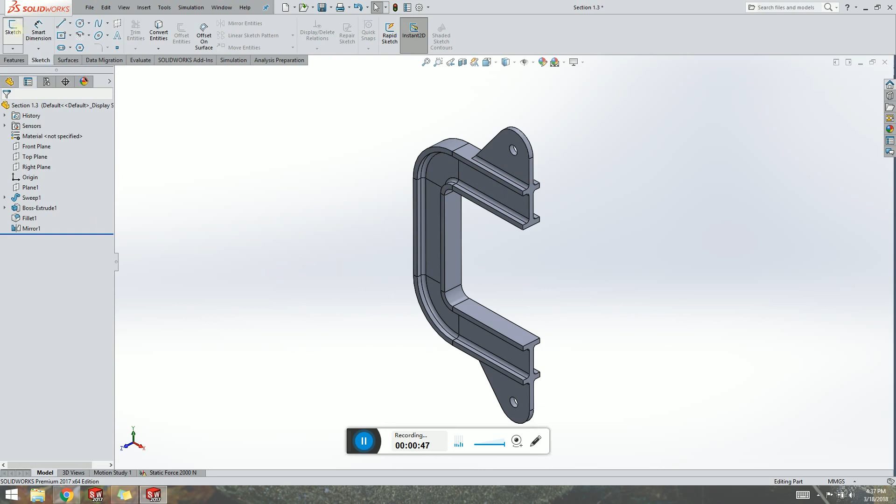So what they do here is they make a sketch, and we're going to do this on the front plane. And then we're just going to sketch points. One's going to be up in here somewhere, and the other is on this face. So we're just going to select that point there, which is then coincident at that midpoint. So for this one up here, we just want to dimension.

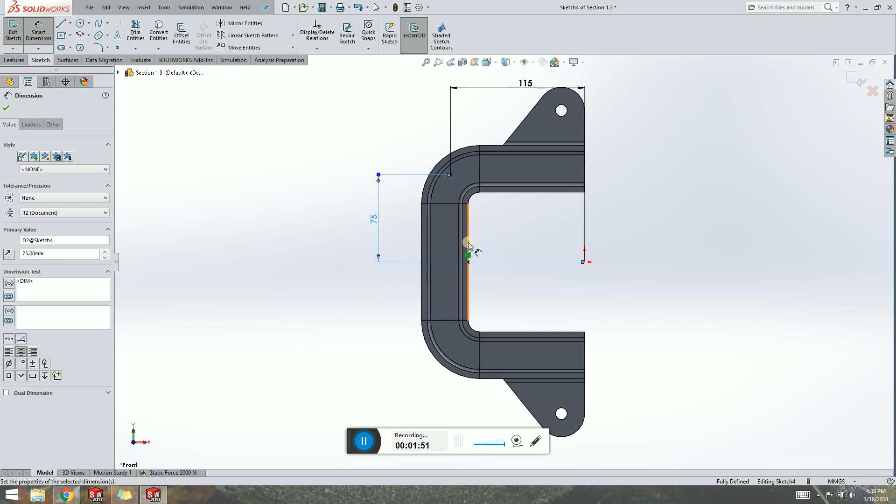I'm going to go, I think it's 100. No, it's got to be 110. Maybe 115. Regardless, I guess it's not that important as to specifically where this goes, but my tool is not selecting as I want it to. This one's going to be 75. Alright, so we have our point in there somewhere. Select that. So now we have these 2 points in the sketch. We can exit the sketch.

To make the sensor, what we will need is to have, I should probably delete the original too. We need to have a feature, a reference point. It can't be a sketch point. It has to be a point from the reference geometry section here. So here we go. We're just going to select the piece we want. We're going to select that point right there. We want it to be on that point. We don't want to make any projection or intersection or anything like that.

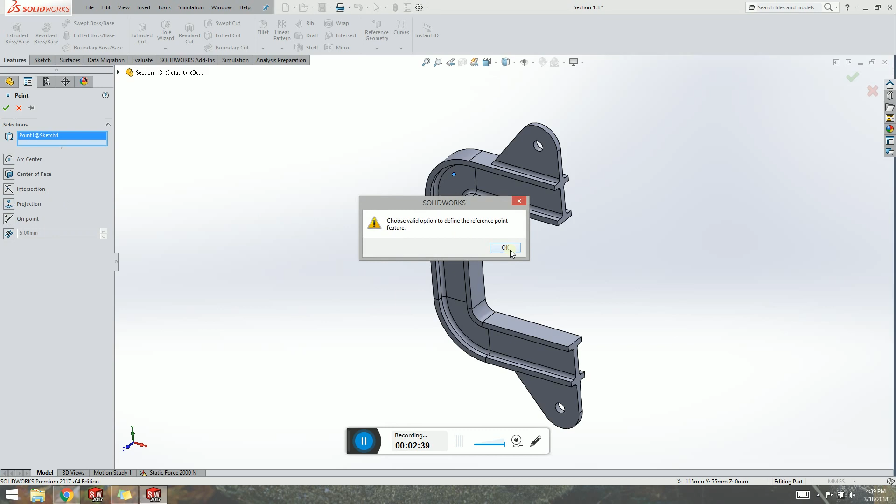Oh, I unchecked point. My bad. There's point 1. And then we have to do the same thing for the second point. So we're just going to go point. I'm going to select. There we go. On point. There we go. So we have our 2 points here. I'm going to rename them just for the sake of it. We'll do sensor 1. And this one will go sensor 2. Yes, I can keep consistency. So we have 1 and 2 here.

All you do is right click on sensors, add sensor. We want simulation data. You can do other stuff here, but we're only concerned about the data for simulations. We'll just do stress, and we'll put that as the X normal stress. And we want this to be average of selected entities. So that allows us to pick that specific point. Otherwise, if we have this max here, it's just going to go the entire part, and that's not what we're looking for. So we're going to select that point. Notice it comes in here, sensor 1, click OK.

Right click again, add sensor, same process. This one we're going to do displacement. Now let's do strain. Equivalent strain. And we'll do this over selected entities. Sensor 2, got it in there, good to go. Alright, so let's go back into our simulations tab. We're going to create a new study. We'll do the static 2.

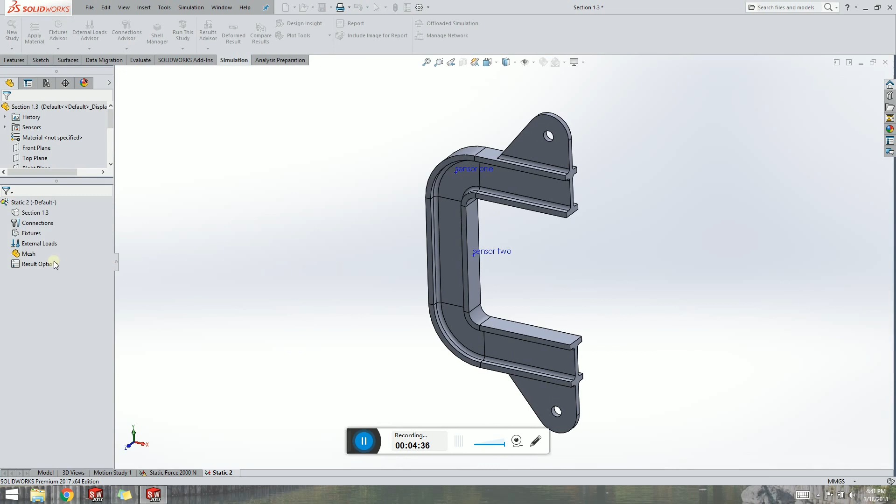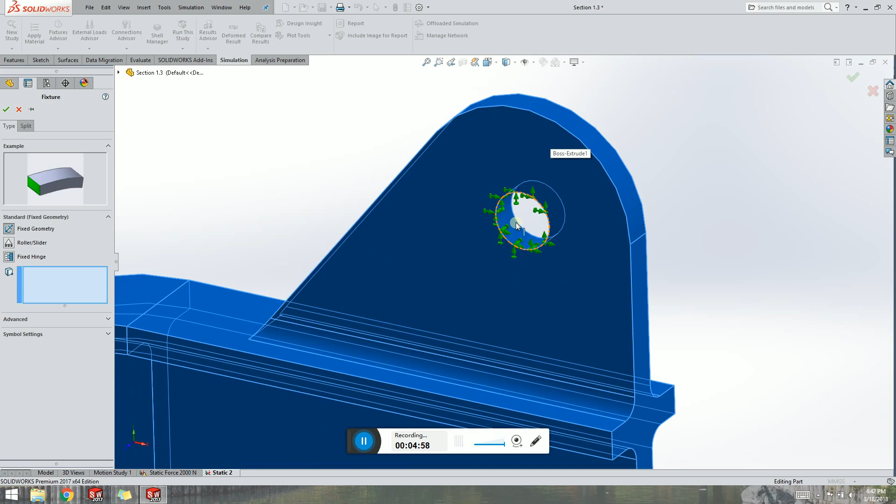And here we apply this material. Alloy steel. Fixtures. Now for this one, we just want to fix that hole up there, and then we're going to pull from this one down here. So we have fixed geometry. We'll zoom in here. That's fixed.

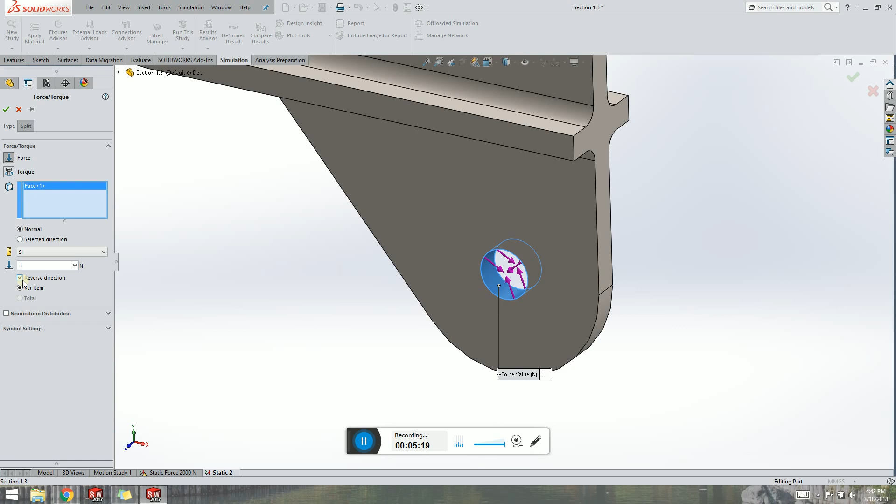We have external load, force. We'll go down here, select that. Notice it's the normal force now, and that's not what we're looking for. Even if I reverse direction, it's still a normal force on that face. So what I need to do is choose selected direction, and then I can pick an edge or a face.

And we have edge 1, and then here we can see the arrows are now pointing in that direction. So we are good to go there. If I was instead pushing up and not down, you can always reverse direction. But we'll make this 2,000 newtons.

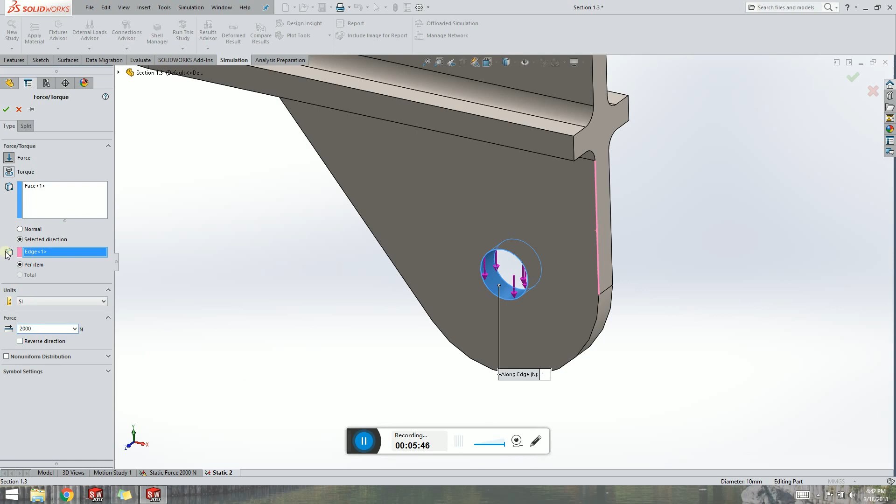So there we go. We're ready to mesh this here. We'll just do a basic one for this. I'll do a separate video on the mesh. There we go. So we got our standard mesh. We'll run the study.

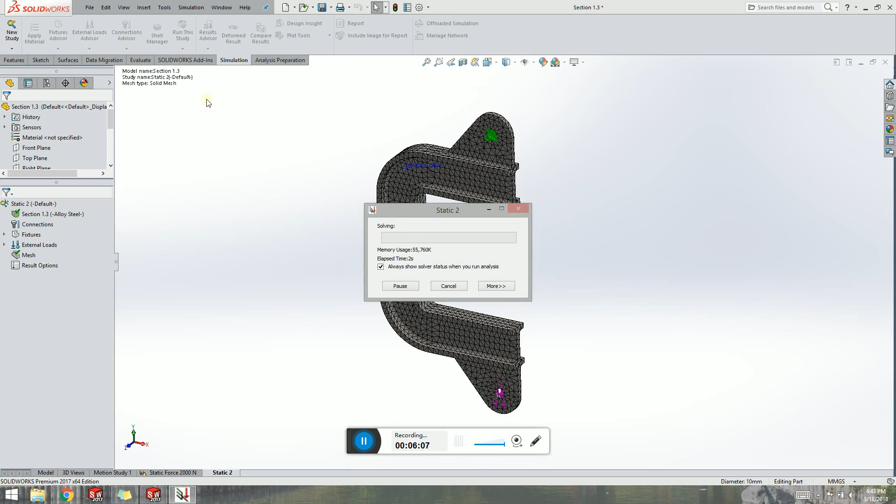Well, that was definitely interesting. Data not available. Oh, you know what? So that one, I decided to do strain, but there is no strain on that face, I'm assuming. So we'll see if I switch that to stress, and we'll do the Y normal stress on that face for sensor 2. Let's do that.

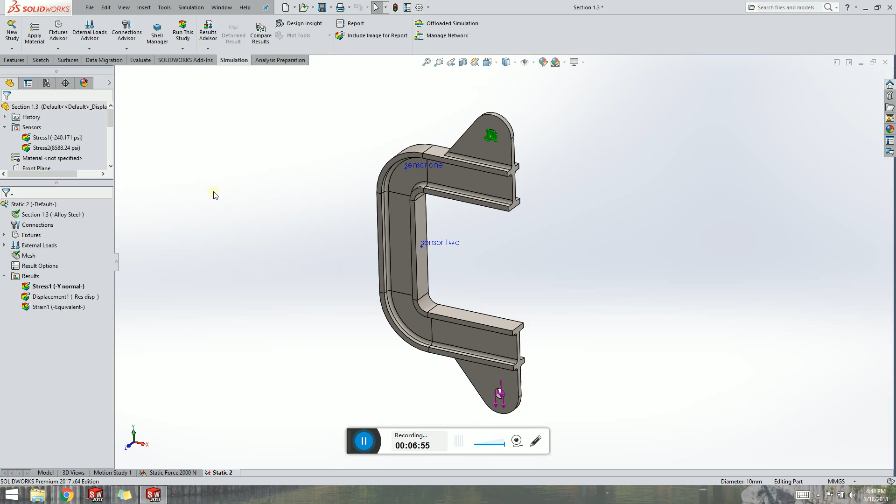If we scroll up here, then yeah, so it was just warning us and saying that we were looking for strain, but it didn't calculate strain at that point. And so it will kind of yell at you. Either way, so we have our stress plot here. We can check out what we have, 105 megapascals. That's going to be at these points in here.

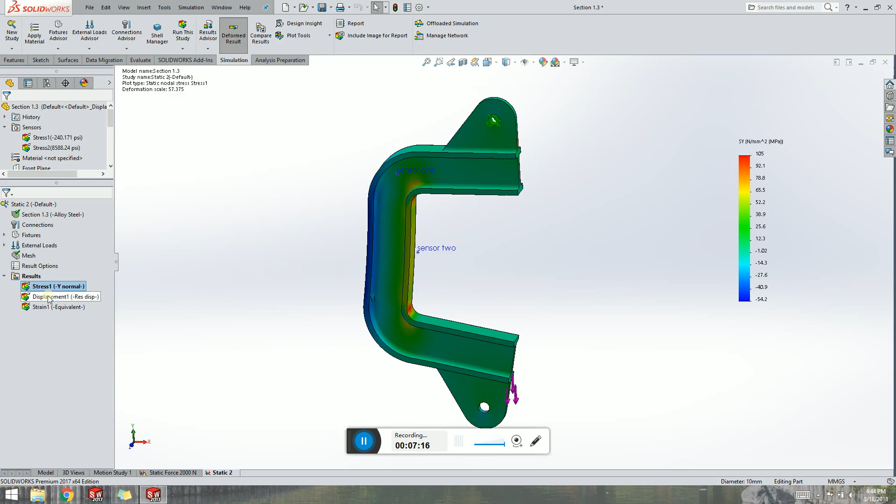So, well, I won't get into meshing, I'll do that in a separate video, but that's something that you can look at, points of interest. So we can check our displacement. We have displacement down there. All good. We can take off deformed result there too.

So let's see. Here, the point of putting the sensor in here is because if I wanted to know what my stress is at this point here, I'm right in between this bluish and then this green and maybe some blend of yellow in there. I don't know exactly what that point is, and I can look over here and drag this over, as my computer is being super slow.

There we go. I can try to guess what's going on in here, but I'm anywhere between 12.3 and 14.3. I'm sorry, negative 12.3 or 14.3. Okay, so that's a little bit odd there. In any case, essentially what that's saying is instead of it being an all pull, at some point in here I'm getting some push, some pull.

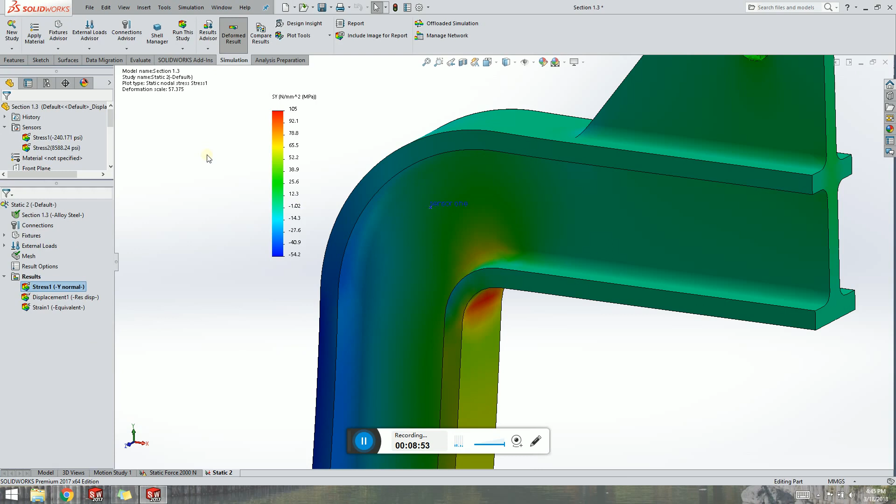So there's no way to really tell what my exact value is there, except for looking up here at my sensor. So that's why we put it up here, so that we can see what exactly we're dealing with. So it turns out sensor 1, I actually have negative 240, so we're sitting kind of right here. How you would be able to determine that, I don't know. I would say don't deal with it, just put in a sensor and solve your problems right away.

And then likewise down here, we're seeing 8500, 8600, something like that, which is much easier to tell on the plot here, just because we have some consistency in here. We're seeing this color there. If I remove deformed result, you can kind of try to match these colors in here.

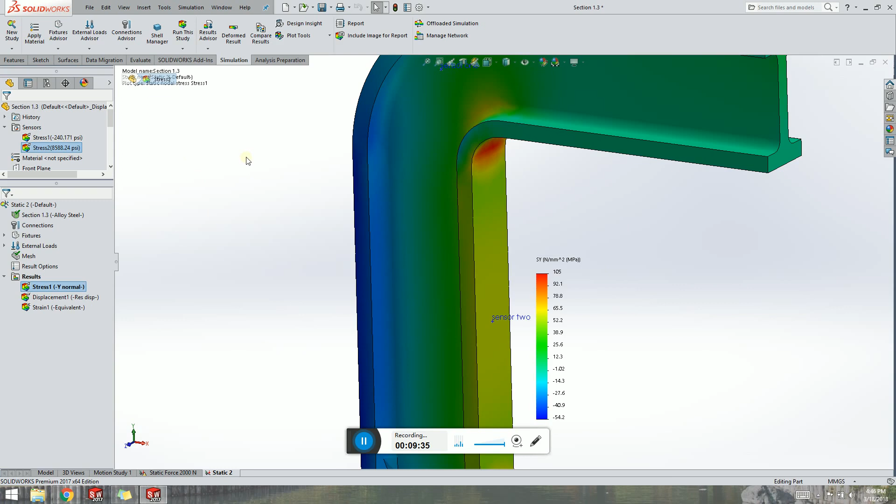Either way, so that's the point of using the sensors. It just really reduces the time that you have to sit there and stare at colors, and it just pops that answer out for you right away. So that'll be good for this. I'm going to try and keep everything below 10 minutes, and it looks like so far we're successful.